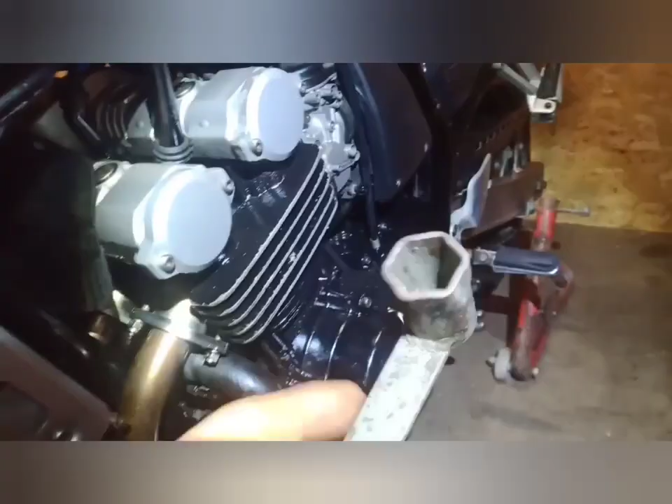Last time I asked you what on earth this thing is, and why do we care? So, let me show you. Fast forwarding here, all I'm doing is using the spark plug wrench I showed you last time to get out a spark plug.

So, this tool has two names. One is a thickness gauge, or as I like to call it, a feeler gauge. So a feeler gauge or a thickness gauge or spark plug gap checker. I call it a feeler gauge because it sounds funny.

And what it is, there is a tiny gap between the electrode and this bit of metal here, and that will make a spark. It's really important that gap is the right thickness. There's the right amount of space between the electrode and the bit of metal there, so that the spark is made efficiently and is the correct type of spark.

Now, I've checked my manual for this, and it says that my gap on this particular engine needs to be between 0.7 and 0.8 millimeters. So we're talking a very small amount. Now, this feeler gauge is going to be useful here quite handily. This has got one that is 0.76 millimeters, so I'm just going to use that.

But if you don't, you've got varying thicknesses. They've all got the thicknesses of each in millimeters, so you just need to combine them. So you can combine them like that. You've got to add the thicknesses together to get the right gap.

Who would have thought that adding decimals together was useful? They should really tell maths teachers this.

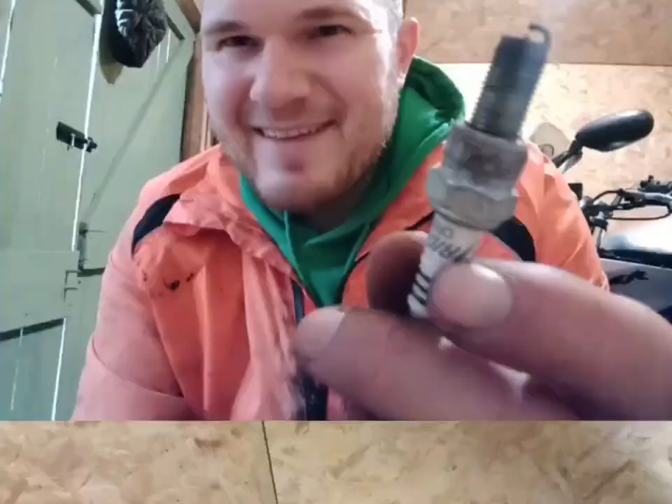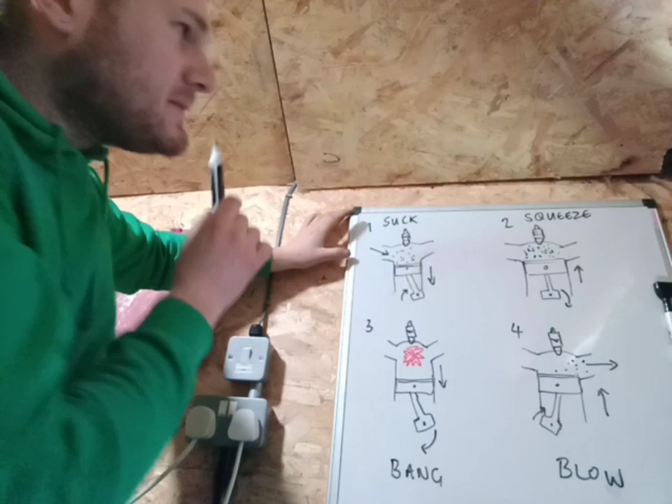So I'll tell you why this is important as well, if you're still here. How engines work. A valve opens and sucks in an air to fuel mixture. So suck, that's your first one. It's then compressed, so these valves close, it squeezes this here, compresses it, so it's really dense.

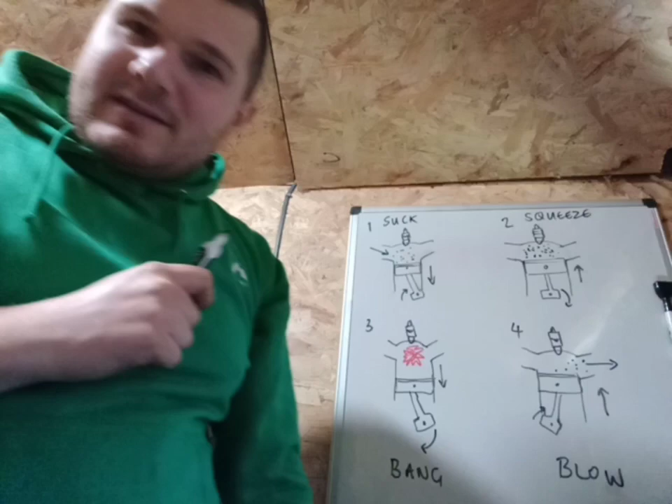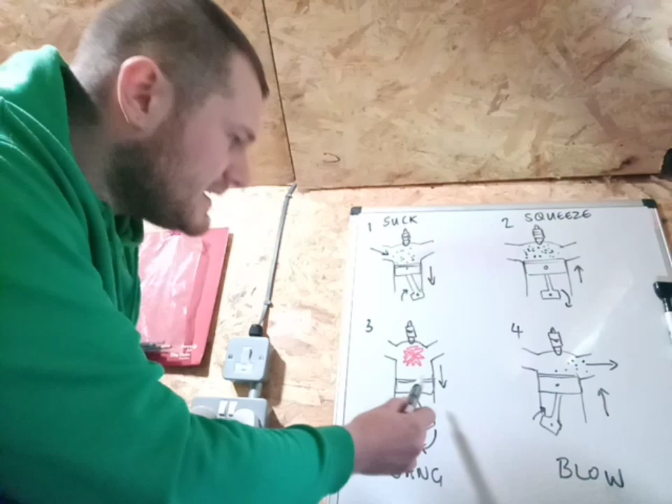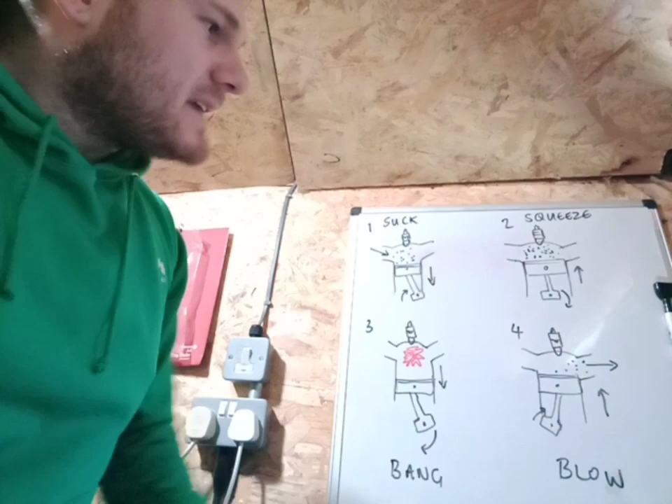This is where your spark plug comes in. The bang! Sets fire to it, explodes the air fuel mixture, which pushes your piston down. That's what creates your power and your drive. So suck, squeeze, bang, and then we've got all this ignited air fuel mixture here, so that blows. We open the valve and it blows out, and that's what goes out your exhaust.

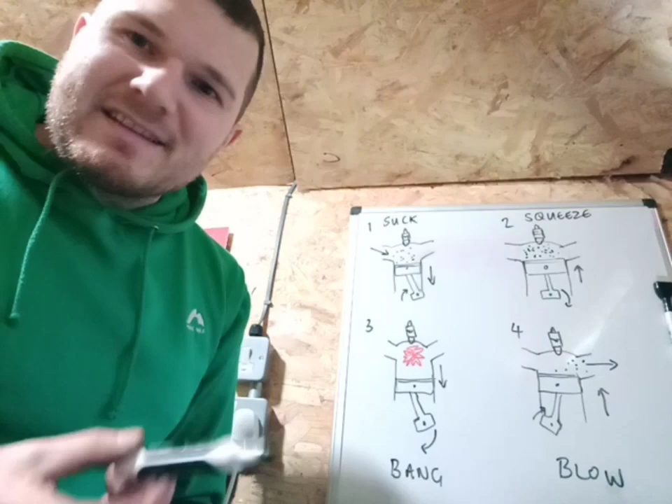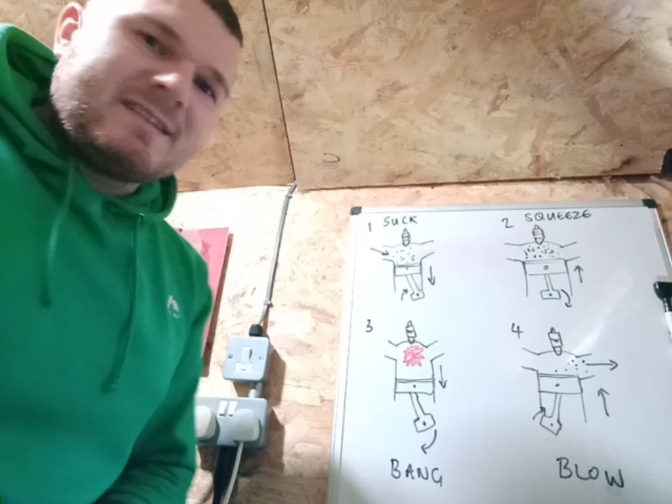So that is why having a spark plug feeler gauge is really useful to make a more efficient engine, so that this suck, squeeze, bang, blow can happen as efficiently as possible, whether that's in your petrol strimmer, your chainsaw, your tractor, your car, your bike, your lawnmower. You want it to suck, squeeze, bang and blow as efficiently as possible.

So, well done if you guessed feeler gauge.